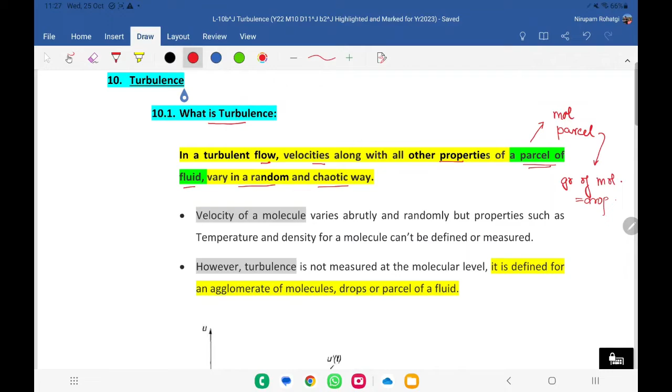We are talking about a parcel of fluid. So there is a difference between a molecule and a parcel. A parcel is basically a group of molecules, right? So you can say it's like a drop. The molecules may be random and chaotic, but droplets are not. Normally in laminar flow, you can't find a drop or part of the fluid going in a chaotic way, but in turbulent flow that happens.

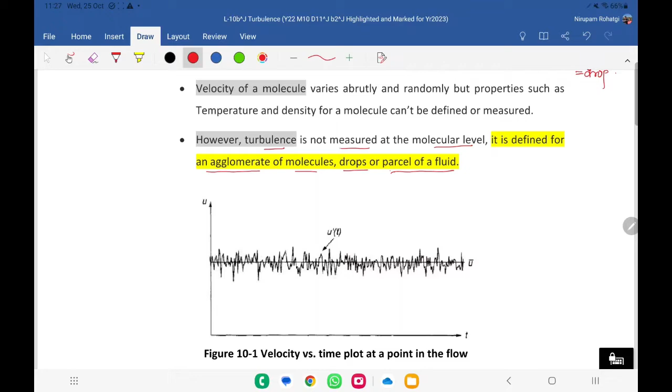However, turbulence is not measured at the molecular level, it is defined for an agglomerate of molecules, drops, or a parcel of fluid. Same thing we are talking about, and this is represented like this: U is equal to U bar plus U prime. This is U prime, which we've discussed, and this value is U bar. And this is our actual value U.

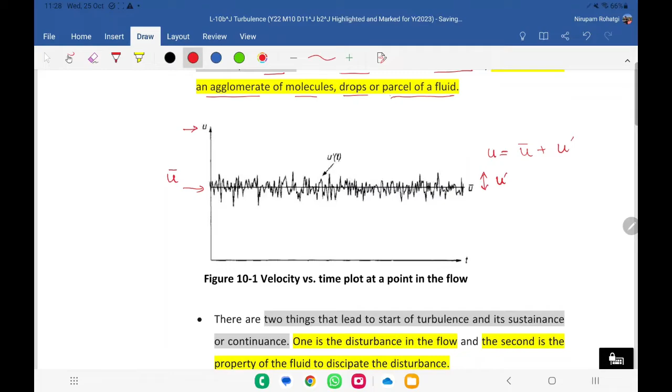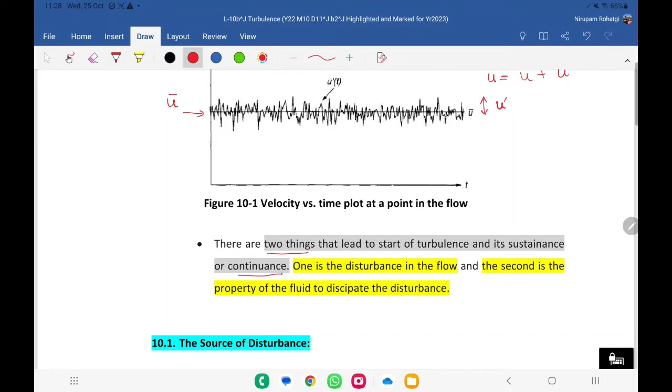Now there are two things that lead to the start of turbulence and its sustenance and continuation. One is the disturbance in the flow, the second is the property of the fluid to dissipate the disturbance. So there are two mutual forces working: one is kinetic energy and the second is viscosity.

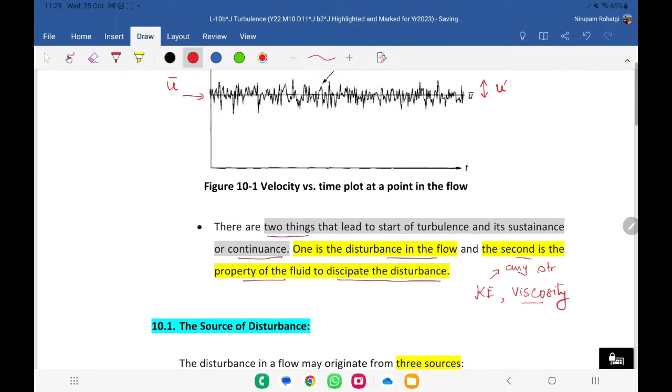It's kinetic energy which leads to turbulence, which initiates it. Of course it's not only kinetic energy, it's the disturbance, or any structure which may cause the turbulence. But what sustains it? Viscosity. If viscosity is less, it will be there for a longer time. If viscosity is more, it will vanish quickly.

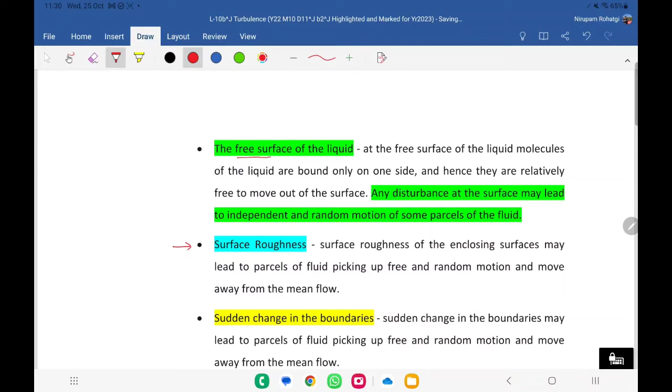Then we talked about sources of disturbance. There are three sources we've discussed. One is the free surface, because at the free surface molecules are relatively free since they are bound only on one side. Then surface roughness is the second, and sudden change in boundaries is the third. We've discussed all of them, so you can look at previous lectures for details.

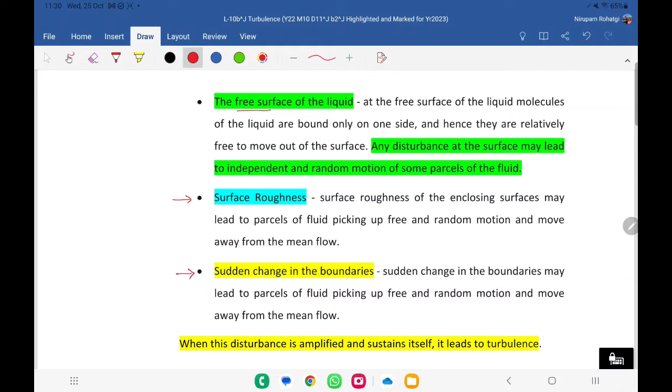Now when this disturbance is amplified and sustains itself, it leads to turbulence. So there is generation of disturbance, then amplification or sustenance of turbulence, and the third is dissipation.

As we have discussed, turbulence starts from deterministic structures. Those structures are not random, like surface roughness or change in surface, or free surface - they are not random, they are defined. But still they lead to turbulence, they lead to some disturbance which actually amplifies, and then it leads to turbulence.

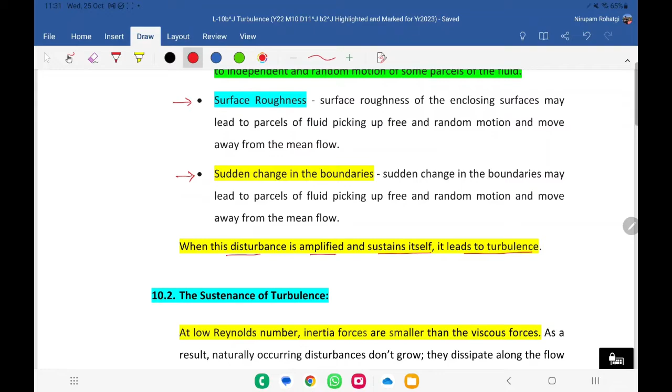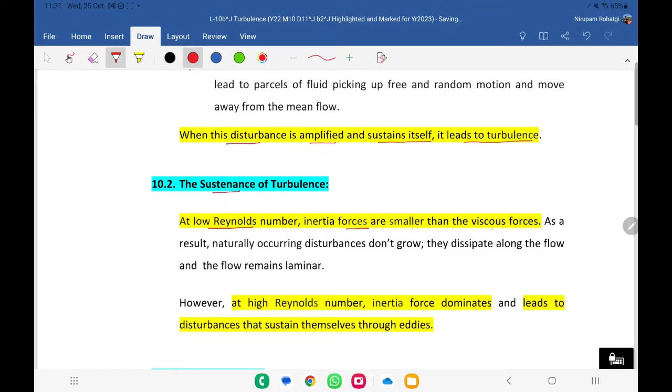Now what is the sustenance of turbulence? We talked about it: at low Reynolds number, inertia forces are smaller than viscous forces. As a result, naturally occurring disturbances don't grow. So if the kinetic energy is small and Reynolds number is small, those disturbances do not grow and they dissipate along with the flow, and the flow remains laminar. It's not that there is no disturbance in laminar flow, but it is small and taken care of.

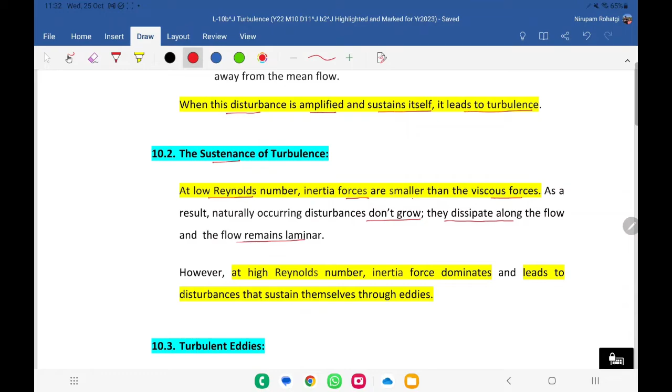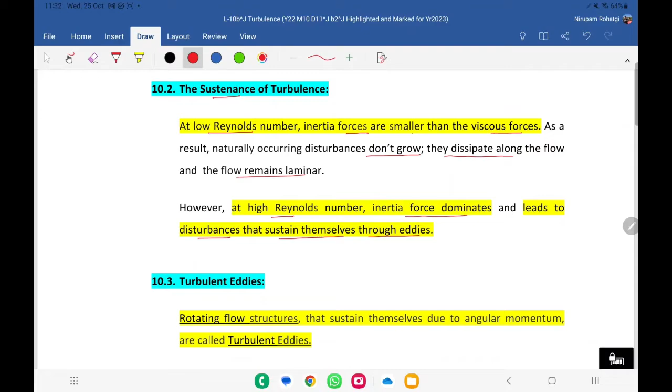At high Reynolds numbers, inertia forces dominate and lead to disturbances that sustain themselves through eddies. Once a disturbance is created and viscous forces are less, that disturbance sustains itself through eddies. Now what are these turbulent eddies? Rotating flow structures that sustain themselves due to angular momentum are called turbulent eddies.

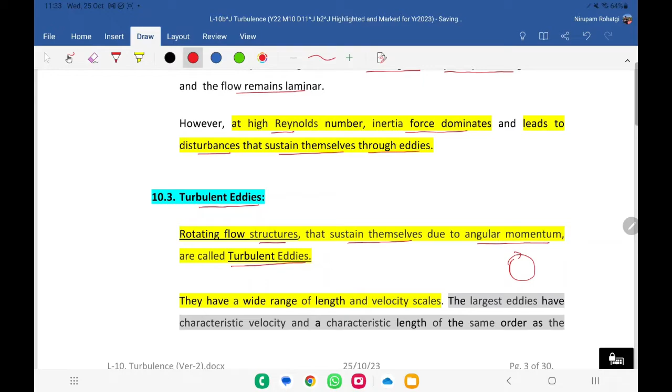So it's basically whirling motions, right? Now this type of fluid motion, because of angular momentum, sustains itself. So the vortices actually sustain themselves, and that is called turbulent eddies.

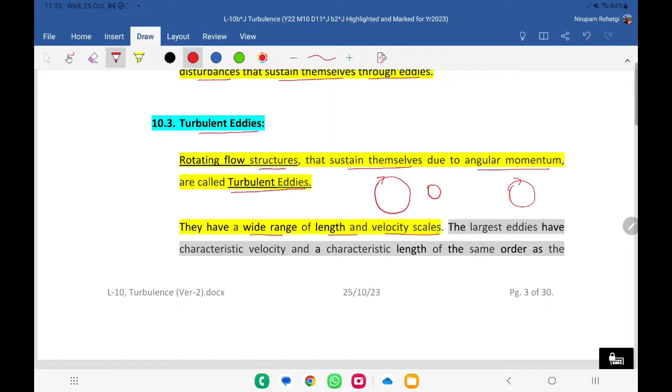Now they have a wide range of length and velocity scales. What does that mean? It's not that there is only one size. You have large eddies, you have smaller eddies. You have some going slow, and others going faster. So their speed may be different, their sizes may also be different - that is why we say length and velocity scales.

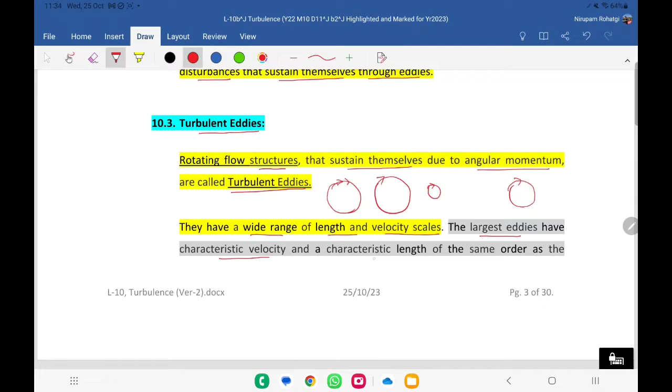The largest eddies have characteristic velocity and characteristic length of the same order as the velocity and length scale of the mean flow. So what will generally be the largest eddy? That will depend upon the velocity of the flow and the dimension of the domain. That determines it - eddies cannot be bigger than the domain size.

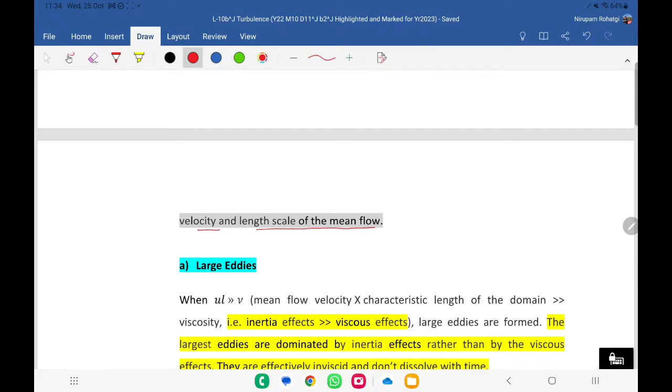Now what happens is, for these large eddies, when UL is greater than nu - that is, mean flow velocity into characteristic length is greater than viscosity - that means inertia effects are greater than viscous effects, the same thing, and this is nothing but telling you about the Reynolds number.

When Reynolds number is high, large eddies are formed. The largest eddies are dominated by inertia forces rather than viscous effects. They are effectively inviscid and do not dissolve with time. Larger the eddy, UL is larger than nu, so it will sustain itself for a longer time.

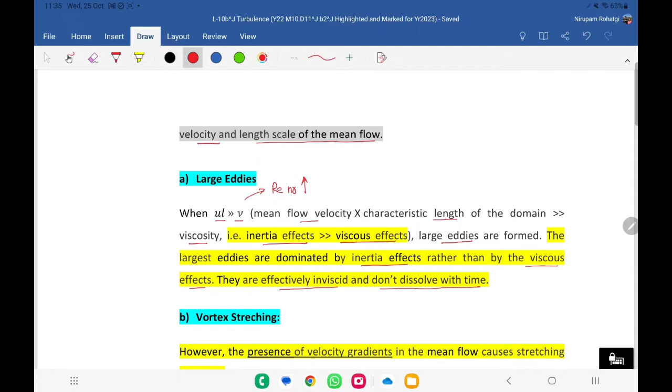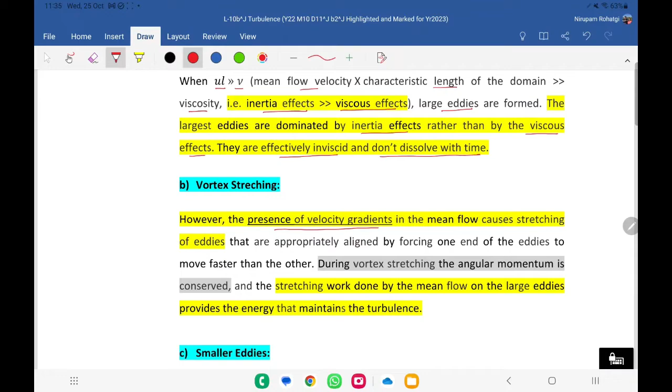Now there is something called vortex stretching, due to the presence of velocity gradients. What does that mean? Velocity gradient is that you have a velocity here, different in velocity as you go in the y direction. Now if an eddy is entrapped in this, what will happen? This will lead to eddy stretching. This is what actually happens.

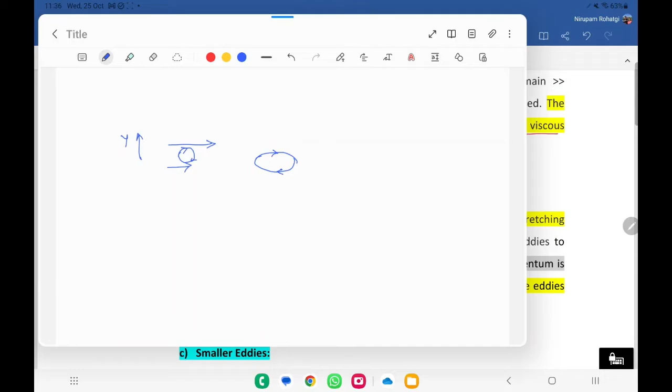The presence of velocity gradient in the mean flow causes stretching of eddies that are appropriately aligned, by forcing one end of the eddies to move faster than the other. So what happens is they start moving, one end moving faster than the other. During vortex stretching, the angular momentum is conserved. So the stretching work done by the mean flow on the large eddy provides energy that maintains the turbulence. This stretching also imparts energy to the eddies.

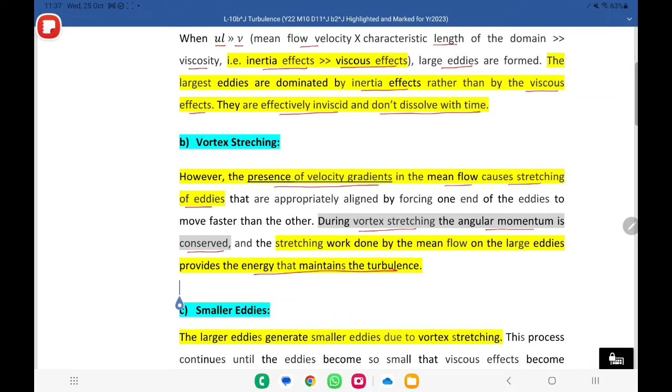Then what happens is these larger eddies generate smaller eddies due to vortex stretching. You have an eddy like this, it stretches like this, then it breaks into two. Finally it becomes unstable and breaks. This process continues until the eddies become so small that viscous effects become important.

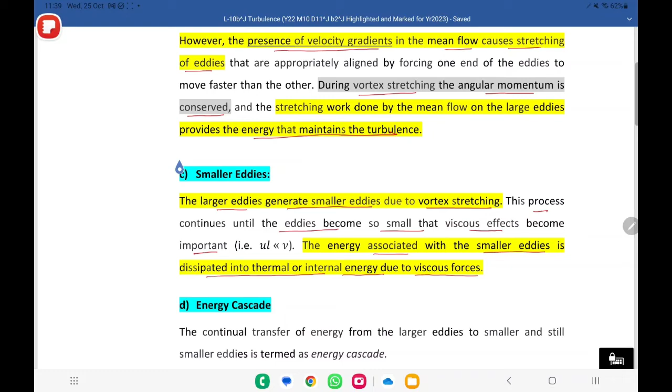The energy associated with the smaller eddies is dissipated into thermal or internal energy due to viscous forces. Slowly these eddies get reduced in size: velocity is smaller, viscous forces are more, and they slowly dissolve into the flow. This is called energy cascade. Energy cascade is nothing but larger eddies breaking into smaller eddies - the continual transfer of energy from larger eddies to smaller and still smaller eddies. So the energy of the bigger vortices is being transferred to the smaller ones, slowly and slowly.

Not that they actually transfer energy directly - what is happening is the bigger ones are generated, they keep on generating and getting divided into smaller ones. So in a way they are sustaining that process. It's not that energy is transferring; it's basically the bigger ones breaking and creating the smaller ones. So in a way you can say the energy is transferred from the bigger one to the smaller one.

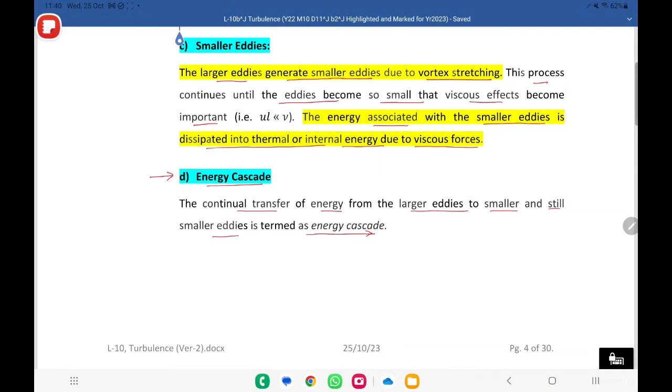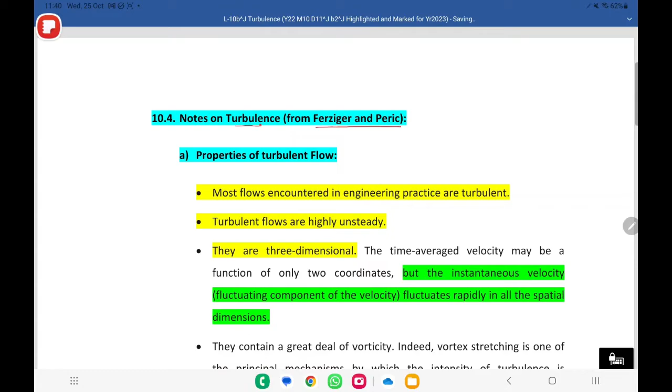Now this is something about turbulence from a book by Ferziger and Peric, talking about the properties of turbulent flow. First, we should know that most flows encountered in engineering practice are turbulent. This is what I was saying from the beginning - most of the time you will encounter turbulence, and that is why you cannot forego turbulence. You have to study turbulence; there is no escape from it.

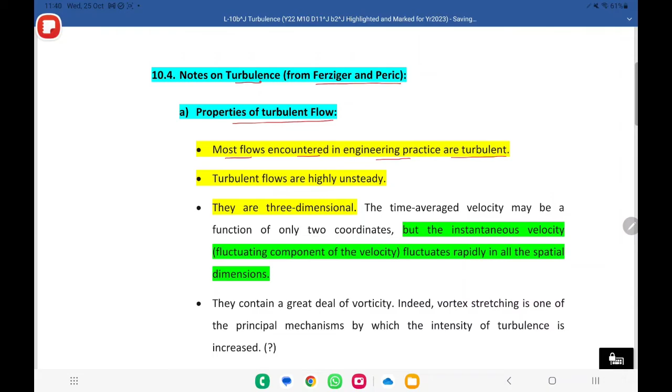Then it says turbulent flows are highly unsteady - that is true, they are changing with time. They are three-dimensional. Although we basically show vortices as two-dimensional, this variation is in three dimensions; they can move in any direction. So instantaneous velocities, the fluctuating component, fluctuate rapidly in spatial dimension. As I told you, there are two components.

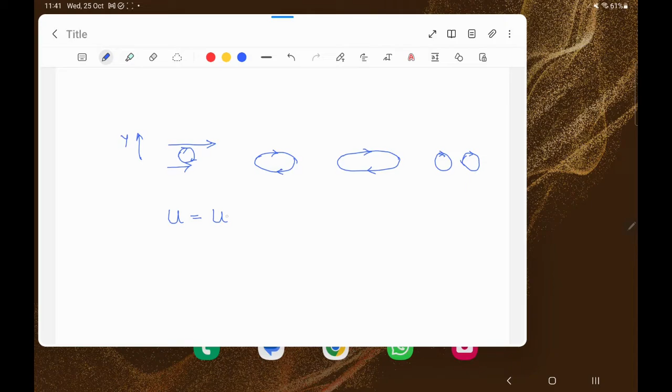What he is talking about is that u is equal to u bar plus u prime. This is the average component. It may be in 2 dimensions, but this variation is in 3D - so the fluctuation is in all directions.

Now what is the cause of fluctuation? The cause of fluctuation is the microscopic structure of the fluid. It's like if you drop a glass, how it will break is not in your control. Even if you hit at the same point with the same force, the cracks in two different pieces will be different, because the inner microstructure is different. How the crack will propagate depends upon the existing structure of the material. Similarly, in a fluid, how the random, fluctuating velocity comes about is actually governed by the microstructure - how the atoms are connected to each other.

And this is varying from time to time. Even when you see that the same flow is going, the same type of flow, internally what is happening is entirely different. So this is what you should appreciate.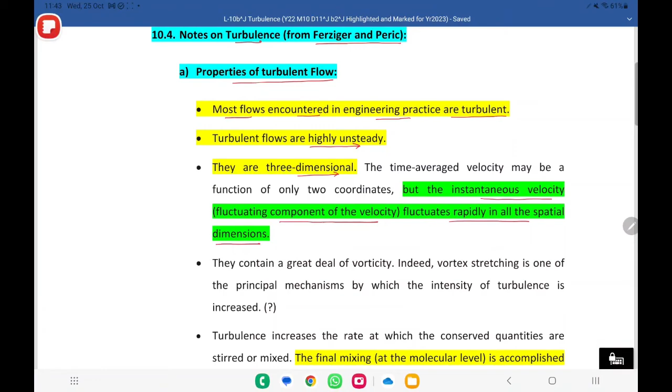They contain a great deal of vorticity. Indeed, vortex stretching is one of the principal mechanisms by which intensity of turbulence is increased. The turbulence is increased, it spreads because of vortex stretching, because unless vortex stretching is there, it will not form smaller vortices and it will not distribute. Once there are smaller vortices, then they can spread anywhere.

So the whole flow will become turbulent. You are starting from a point where the large vortices are generated, and that is a localized region. But after certain time, the whole flow is turbulent, which we showed in the first 2-3 slides, in which when the vortices were formed, at that point they had a fixed structure, but afterwards they break away and mix.

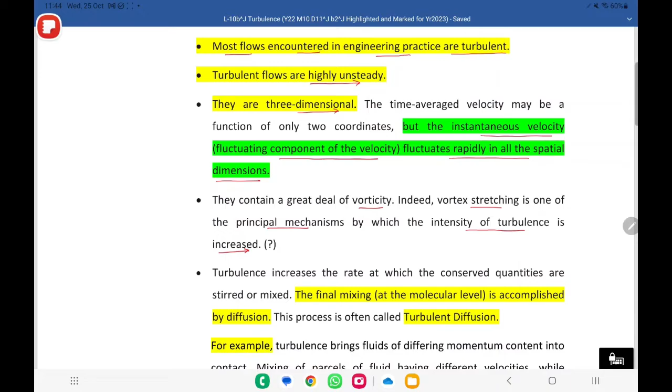Now it is very important why turbulence becomes important. Turbulence increases the rate at which conserved quantities are stirred or mixed, and the final mixing at the molecular level is accomplished by diffusion. So there are two types of mixing taking place: one is the mixing at the parcel level, and the second is mixing at a molecular level.

Now I give you an example. You are spraying water on your garden. Let us say there are no trees, no grass, only clean earth there. You sprayed water. Now what is happening? Water droplets are falling everywhere.

Now these droplets, where they form, after some time what will happen? They will start seeping all around. So even when a particular point the water has not dropped, it will become wet after some time, because molecular seeping will start. So this is called molecular diffusion.

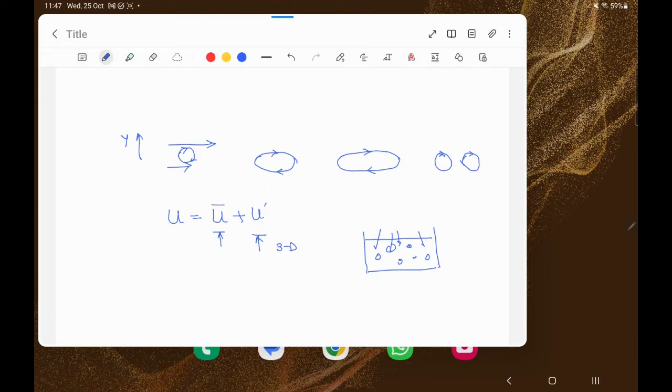One is mixing at the macroscopic level, one is at the microscopic level. This process is often called turbulent diffusion. When you are mixing in terms of particles, parcels of the particle, that is turbulent diffusion. And mixing at the molecular level, the final mixing is at the molecular level.

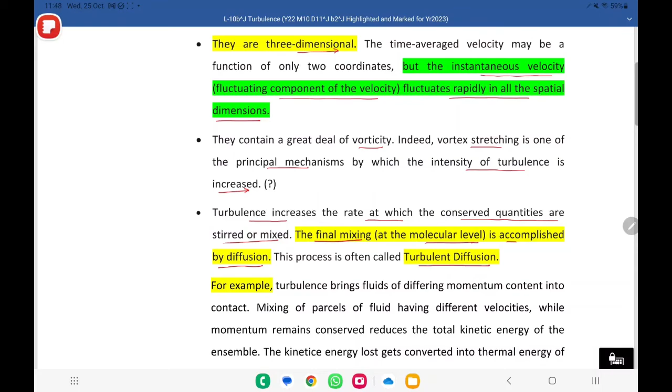Now, what is the result of that? Both mixing and heat transfer may be increased by orders of magnitude due to turbulence. Now, with turbulence, what happens when you are spreading it all around? Your mixing becomes very fast. Again, take the example of watering the earth.

If you leave water at one point, water reaching all the area will take a lot of time. You are putting water only at one point - it will slowly get distributed all over. But if you are spraying it, then you can cover the larger portion quickly. Then your mixing is happening 10 times or 100 times faster. That is why you put a sprinkler.

Earlier in agriculture, what they used to do was make small canals, put water there, and that water goes there, and then there are branches and water goes there, and finally it fills - wherever water is going, it will first soak that place and then go onward. That type of watering is very slow.

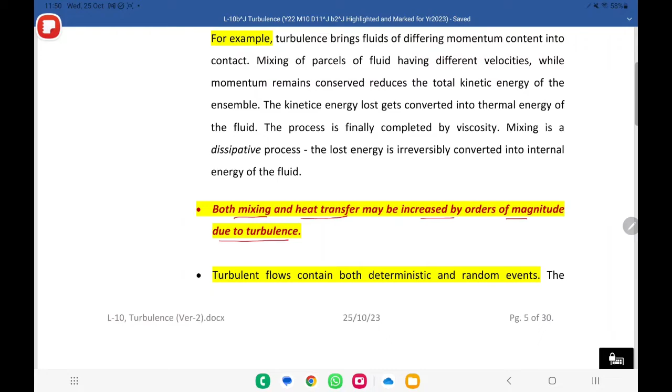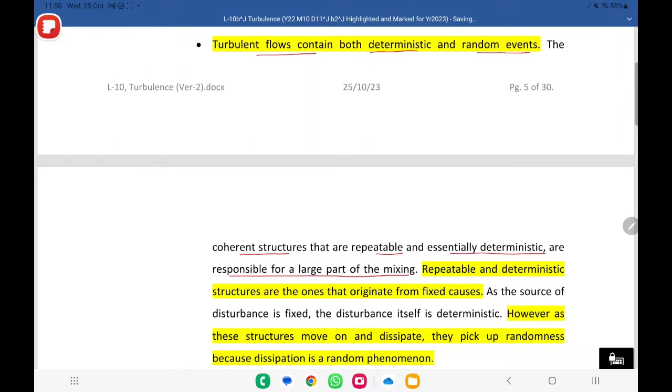Now it says that turbulent flows contain both deterministic and random events. The coherent structures that are repeatable and essentially deterministic are responsible for a large part of the mixing. The repeatable and deterministic structures are those that originate from fixed causes. So there are places from where the turbulence starts - they are repeatable. These are the deterministic structures, the ones from where the turbulence originates.

As the source of disturbance is fixed, the disturbance itself is deterministic. So what you are saying is that your disturbance is deterministic. You know a lot about that disturbance, how it is, what is the velocity, how it is starting. You can find out, and you'll find that it moves in a fixed range.

Suppose there is a vortex which is starting. At the starting point, you will know its angular velocity and its size - you can make out. But however, as these structures move on and dissipate, they pick up randomness, because dissipation is a random phenomenon. We have talked about it.

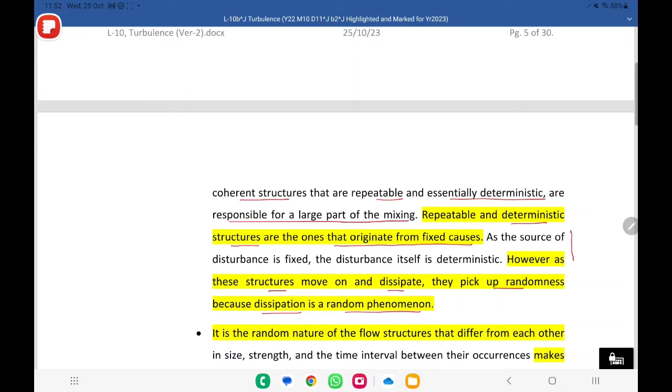It is the random nature of flow structures that differ from each other in size, strength, and time interval. As the larger vortices start breaking into smaller and smaller ones, the randomness keeps on increasing. And that makes the study of them very difficult.

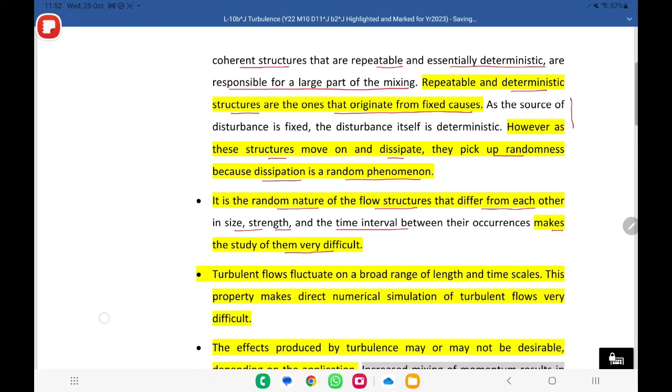Turbulent flows fluctuate on a broad range of length and time scales. Their sizes are different, their angular velocities are different. This property makes direct numerical simulation of turbulent flows very difficult. So we have talked about it.

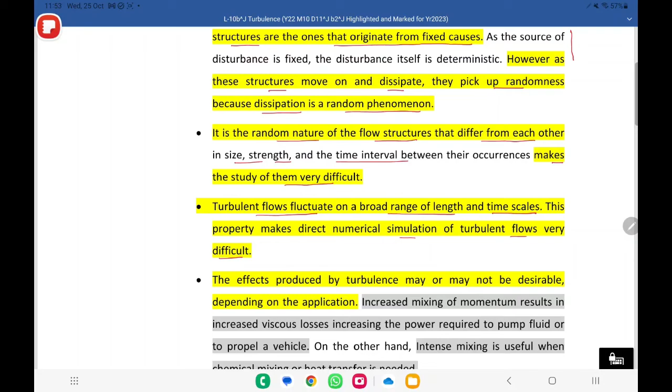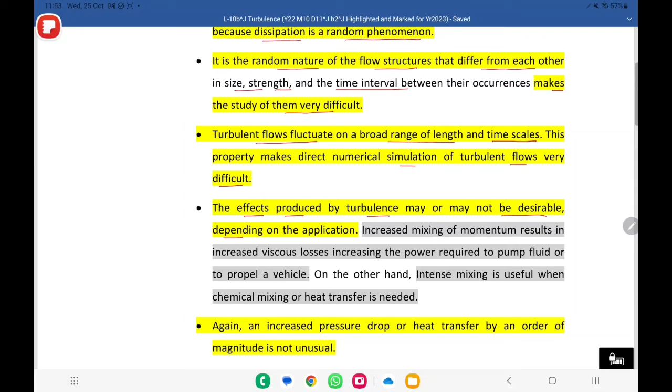Effects produced by turbulence may or may not be desirable, depending upon what is our objective. If we are looking for heat transfer, or mixing of chemicals, then turbulence is desirable - we create turbulence. But when it is a question of moving fluid from one place to another, turbulence is undesirable because you have to do more work. Your viscous losses increase and you have to put more energy to flow. It's better that the flow is non-turbulent or laminar. So it depends - sometimes you may want it, sometimes you may not want it.

Again, the increased pressure drop or the heat transfer by an order of magnitude is not unusual. The rate of heat transfer and pressure drop are not slightly different from laminar flow - not 10%, 15%, like that - they are different by an order of magnitude, significantly different. Which brings us back to the same thing, that turbulent flows cannot be approximated by laminar flow. There is a significant difference between them.

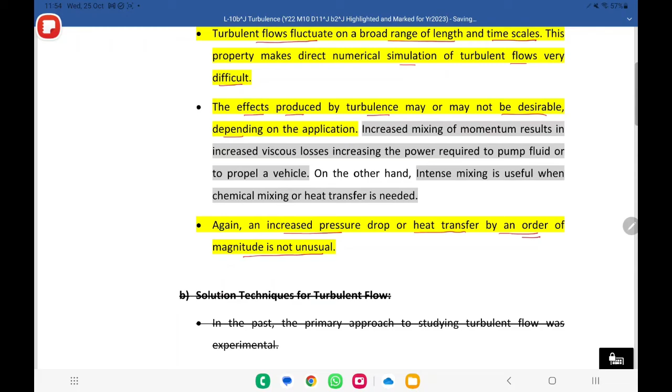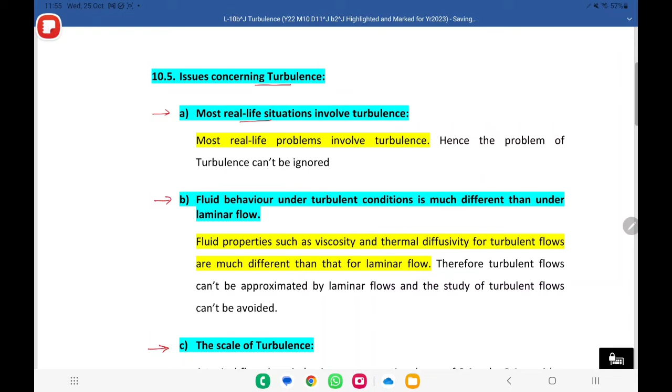In fact, issues concerning turbulence - we have talked about this, that most of the real situations involve turbulence. The fluid behavior of turbulent flow is much different than laminar flow.

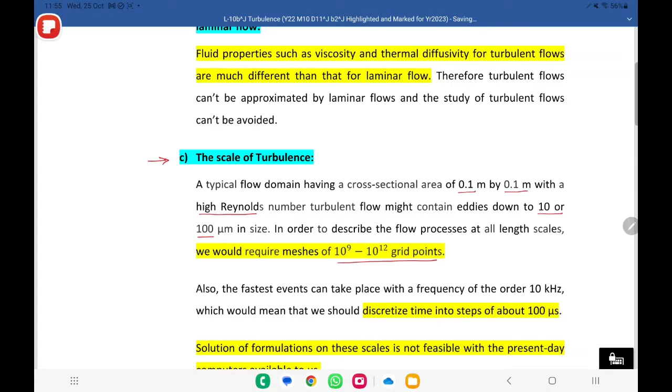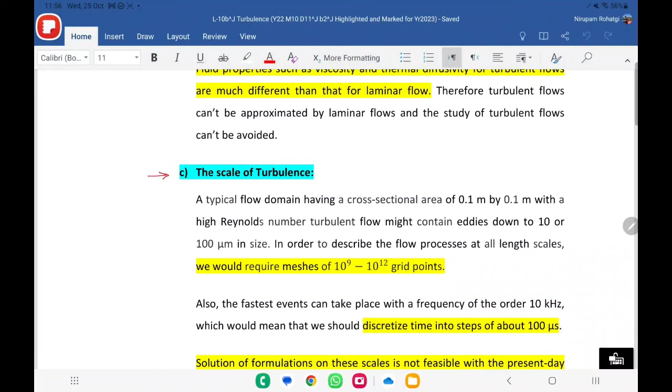Then we talk about scale of turbulence, and I gave you an example that if you have a region of 1 meter, 0.1 meter by 0.1 meter, at high Reynolds number, then your eddies can be as small as 100 micrometers, and you may need grid points up to 10 raised to power 9 to 10 raised to power 12. 10 raised to power 9 is a million - no, 10 raised to power 9 means 1 billion, that is 1000 million, and this would be 1000 billion.

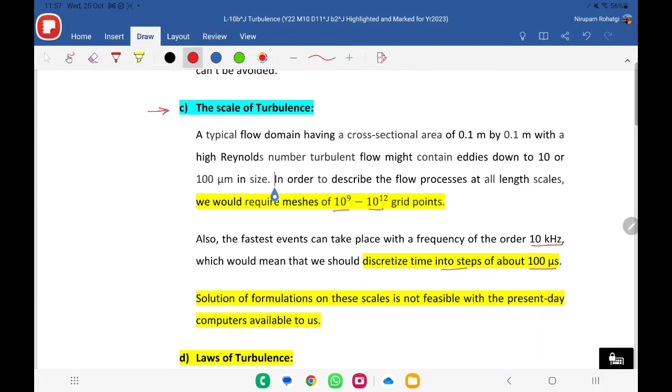Then we have said that you will have to break time steps into 100 microseconds if you have a frequency of 10 kilohertz. Now again, this means that it is not possible - it becomes very, very small. You require a very high capacity computer.

Now what is this law of turbulence? This is also important. What are we saying? That we have no equations to predict the random fluctuation in velocity and other flow parameters, which are caused by surface roughness, microscopic features of the surfaces, or microscopic behavior of the fluid. This randomness is coming because of surface roughness or the microstructure of the fluid, and there are no equations available to predict that. We cannot study those microstructures.

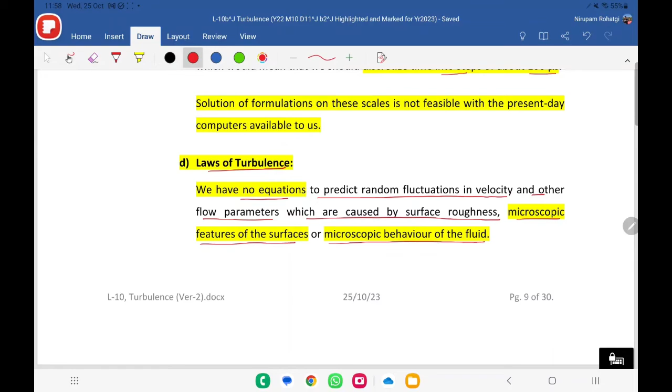Even if we study them, there is a limit to which we can go, and if we go further, that much data cannot be included. That is why we have talked about this problem also - what is the solution available. For turbulent flow, we have no such law which can help us solve the problem, which can predict what is happening. We need to know the velocities, and subsequently the temperature and the pressure. Now we are not able to know, because it becomes a random flow.

So another solution available to us is to reduce the size of the grid. This is also important - if your cell size is greater than the size of the vortex, then for you the velocity is zero, because your velocity is actually an average velocity of the flow. So if you need one velocity to define this cell, it is zero.

So another option available to you is to break it into 4 parts, and if it's 3D, you break into 8 parts, and now you have 4 velocities to define the flow. You are closer to the reality. And that is why you have to go to smaller and smaller size of the thing.

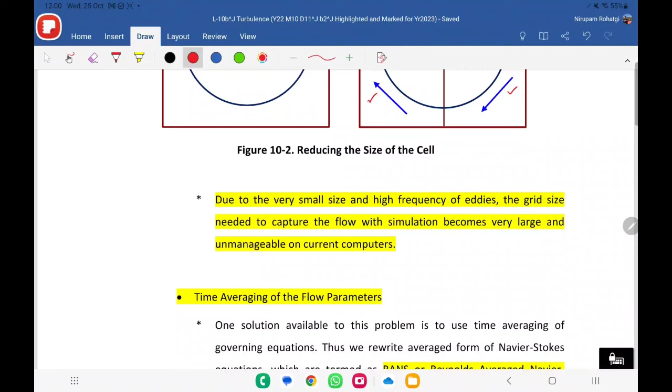So if you are going smaller and smaller, your grid size will become bigger and bigger, and it is unmanageable for very large cases and unmanageable on current computers. So this thing cannot be done.

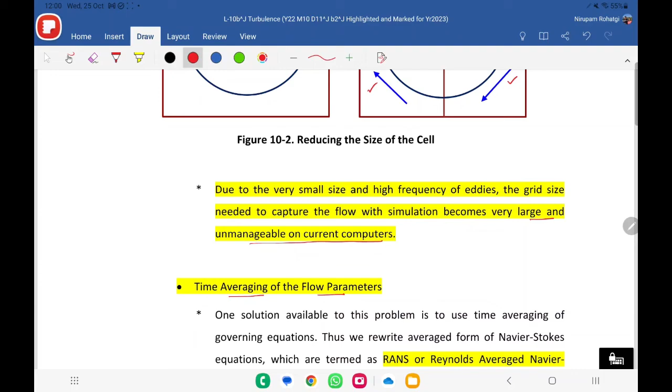So we go for time averaging. We have talked about this, and that is called RANS.

Now when you are doing time averaging, what is happening is you come across terms called Reynolds stresses. Now we have no laws available to account for Reynolds stresses. These are 9 variables which are random variables. You don't know anything about them. You have no law to predict them, right?

So it becomes an open-ended problem, instead of a closed-ended problem where the number of equations and number of unknowns are known. This becomes an open-ended problem where the number of unknowns are much more than the number of equations.

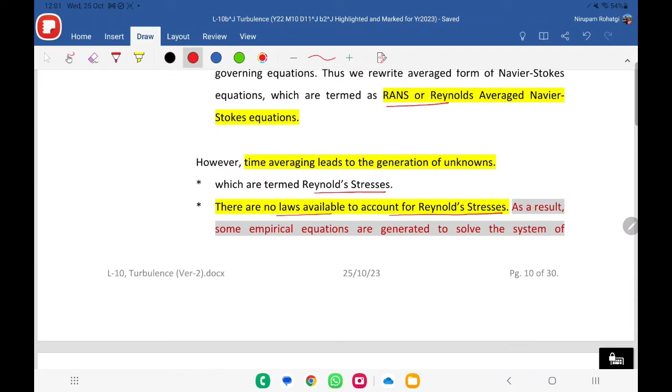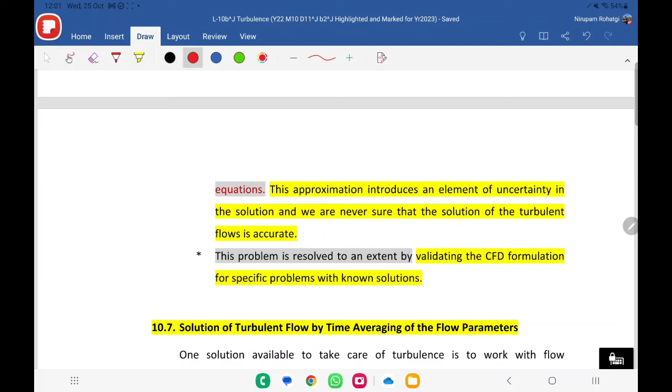Now then we have to make approximations. As a result, some empirical equations are generated. Now you know that RANS we have adopted, but the moment we have adopted RANS, we have to develop equations, because we are encountering 9 unknowns. So we have to have equations for them, and we don't have any theory for them. Those are random variables, random fluctuations. So what we do, we basically make empirical equations for them.

What does that mean? Empirical equations are based on your experience and theory. It's a mix of theory and experience, but it is not 100% theory. So it depends upon the type of flow, your understanding, and your approximation, etc.

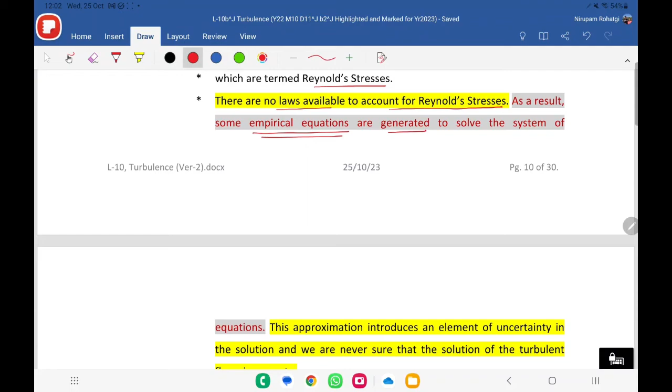So these approximations introduce an element of uncertainty. The moment you are talking about a model, it is an empirical model. It is an approximation, right? And there are a number of models. You choose one of them.

If it was theoretically possible to define the randomness, you could have developed one model, one set of equations, and the computer would select whichever equation applies. Maybe even if there are 10 different equations, one applied in one case, one in another - like a stepped function, you know - in one case some function is applied, in another something else. Even if that is defined and if you know the function, you can switch from case to case, right? But the problem here is we do not know any case, we are not sure about it.

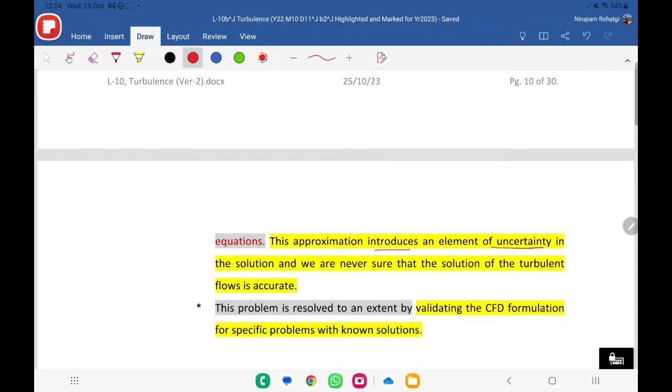Those empirical equations are not 100% correct. So this is the problem.

So this problem is solved to an extent by validating the CFD formulation for the specific problem with a known solution. So here we talk about validation.

So that is why validation becomes very important. Whenever you will be solving a CFD problem, people will ask what is the validation, and in validation what you are doing is solving a known problem with the model you have adopted and saying that my solution with this set of problem is almost as per the actual problem, experimental data, which means now I can extend it to the other problem.

So basically what I am saying, I am making a small jump - that my model is good for this particular case. Now the second case is slightly different from this, so I assume that whatever I am doing here will be applicable there also. And that is why validation becomes important, because you never know what is the real equation for that particular case which you are talking about.

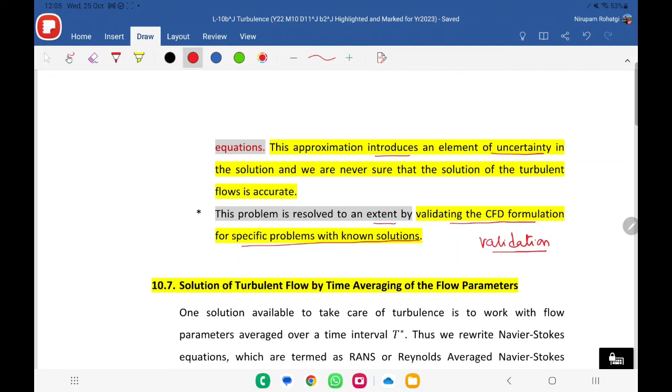So this is what we have given, a brief summary of what turbulence is. It's almost a repetition, except that we have covered some points which were not there. I think most of the points were there.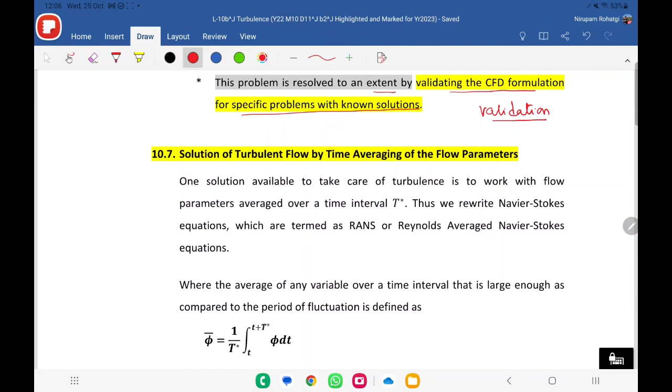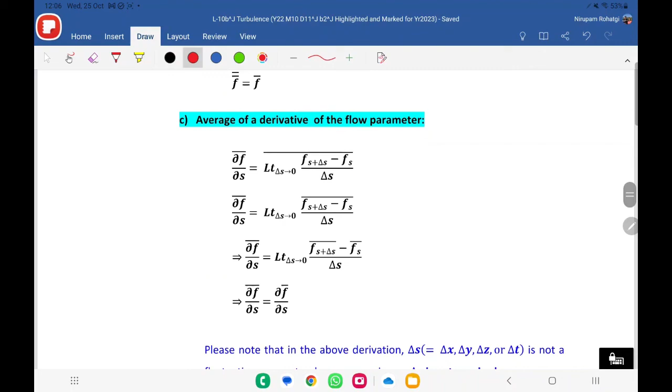Now in the next class we'll be talking about these equations, and in these equations basically again we will be just doing the mathematics of it, and I'll see if I can pass on this mathematics to you in a simple way.

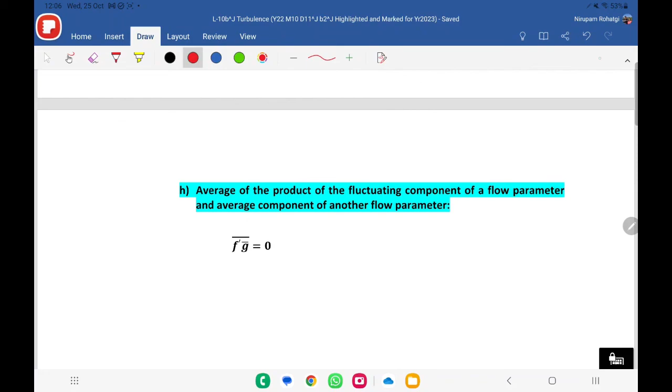So what I am talking about now, another 2 minutes I will take. What I have told you is that you require models, right, to solve a problem, and which model is good or bad or which is suitable here, that you have to decide. That depends upon the experience and what people have done before. Now we will just give a slight insight into how a model is developed. That is the only thing, and that we are talking about is the K epsilon model.

Even this description will be very, very superficial, just to expose before you the complexity of these models. And then there are a number of models like this, 7 or 8 or maybe even more, and each has its own mathematics, and that mathematics is real tough. But we are not going into it. We will be using the models directly, but some insight I will give you into the K epsilon model, which I found is the simplest one from the mathematical point of view.

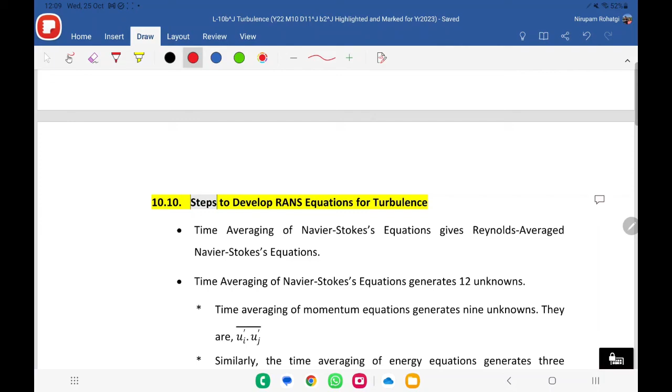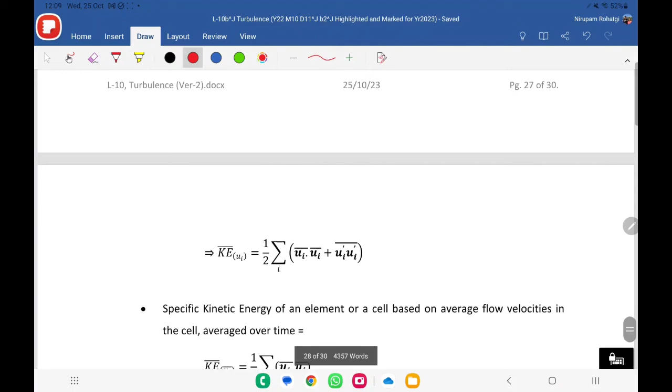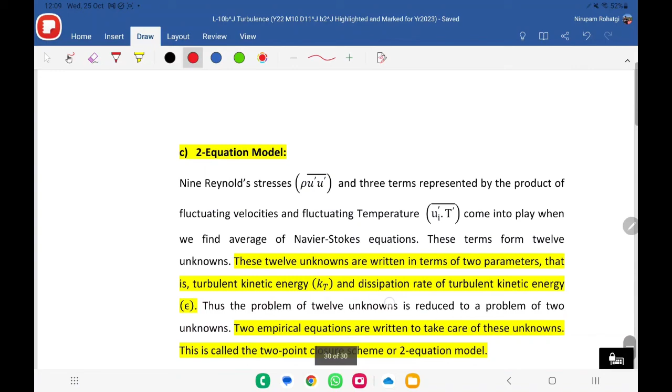And then at the end of it we will be talking about what is turbulent viscosity, turbulent kinetic energy. Those things will come. Okay, so we stop here.